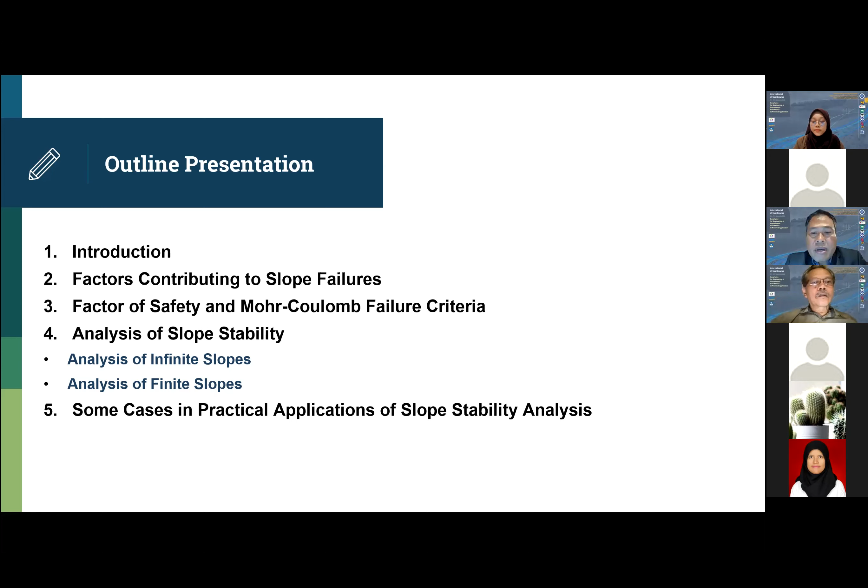In the fourth section will be the analysis of slope stability itself. I would like to explain two types of slopes: one is the infinite slope, and the second one is the finite slope. The last one covers some cases in practical application of slope stability analysis.

Let me start with the introduction of slope. Well, slopes are typically categorized into two types. The first one is natural slope, as you can see in many areas where the slope is formed by natural state, and artificial made slope. This is a man-made slope. Usually in civil engineering we design and construct many man-made slopes.

In other engineering professions, like in mining, for example, there is open pit mining, tailing dams, and many other facilities or infrastructure that are actually man-made slopes. So we need to design that slope.

Natural slopes are formed due to physical processes that include plate tectonics and weathering or erosion of rock masses that result in material deposition. Whereas artificial slopes are established to facilitate infrastructure projects, for example embankment of dams, road cutting, and so forth.

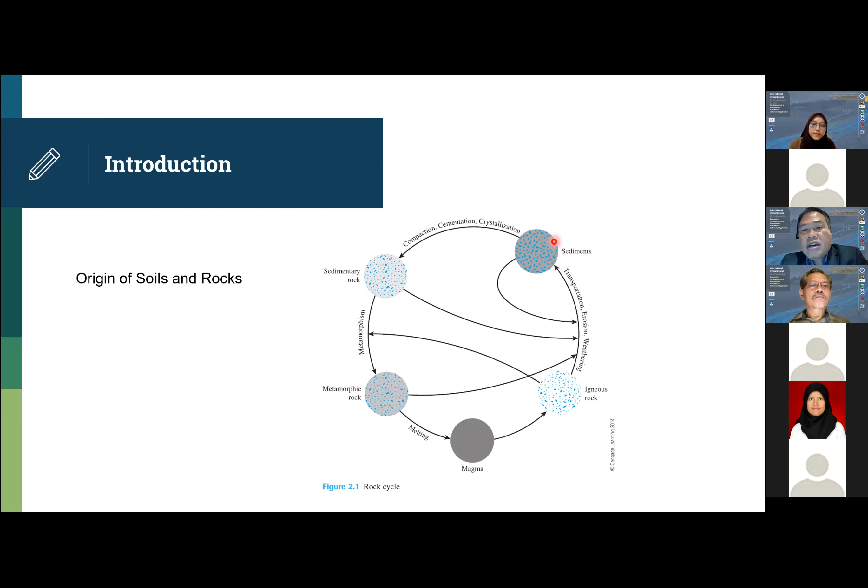It could be eroded or weathered, become a sediment. So there is another form of rock that's called rock sediment, and this sediment also could compaction, cementation, and crystallization to become sedimentary rock.

And then from sedimentary rock, because of metamorphism, this sedimentary rock then becomes a metamorphic rock, and through melting, through magma from the volcano for example, then returns to become an igneous rock. So this is actually the nature of the rock cycle, where the soil is actually the weathering of this rock. So soils and rocks are actually common in nature.

Soil and rock have a very similar formation, except that soil is much softer compared to rock. So in nature, we have a slope problem, either in the rock formation or in the soil formation, depending on whether the slope is stable or not.

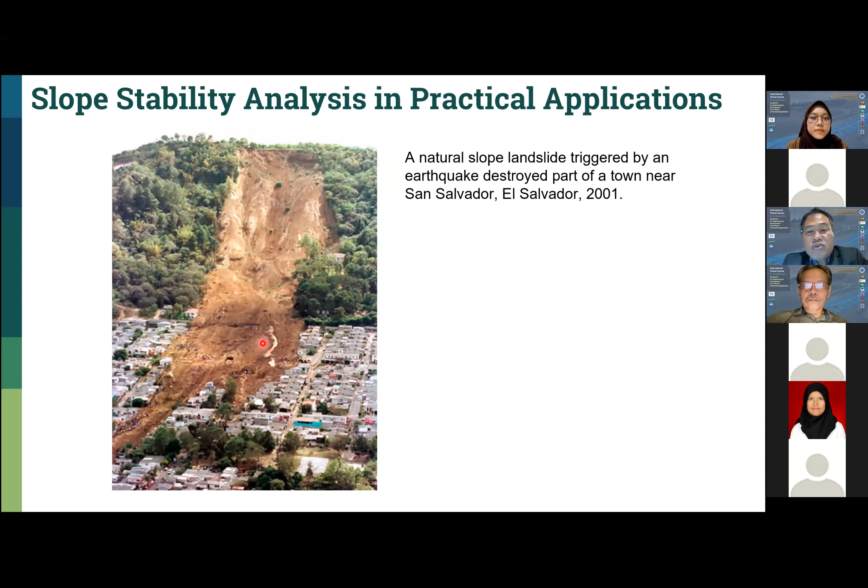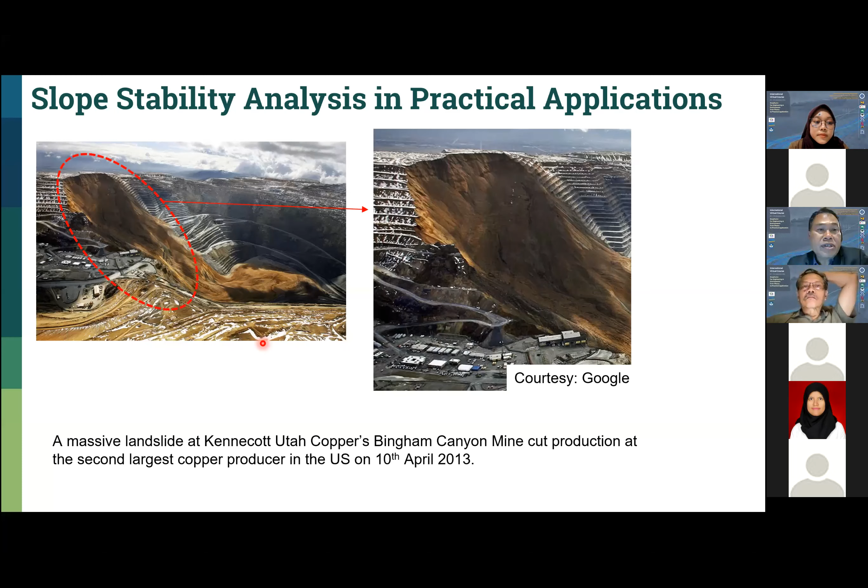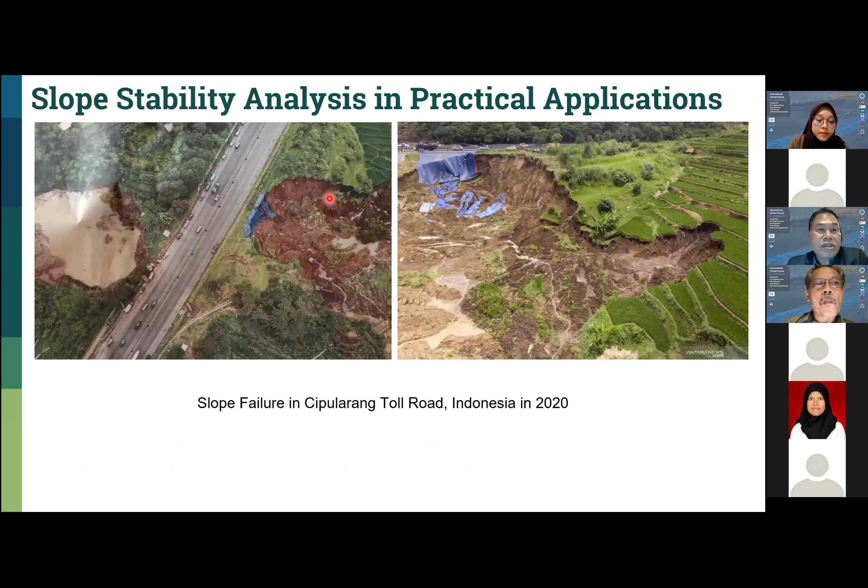Okay, many slope failures - the nature of the slope failure include fall, topple, slide, spread, flow. Many types of slope failure could occur.

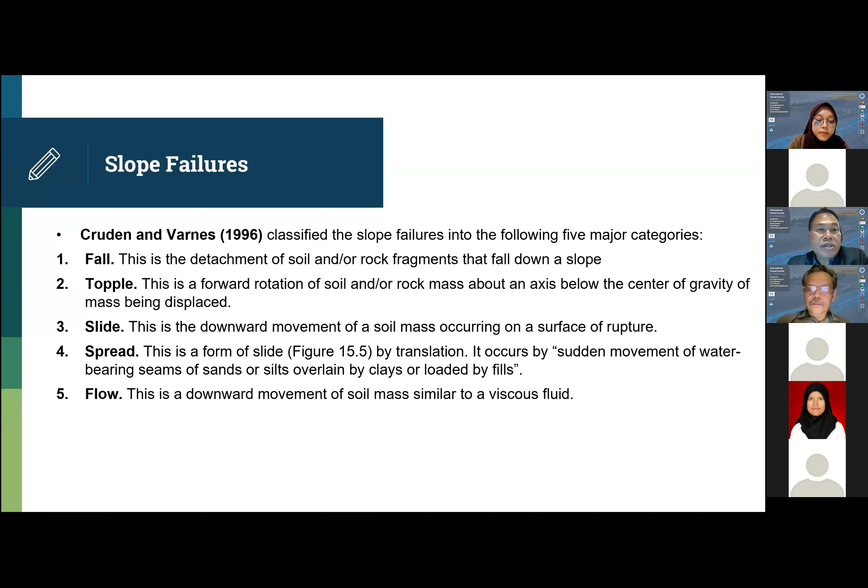It's just like a fluid. Many failures occur in this type of soil because of the combination with precipitation and then...

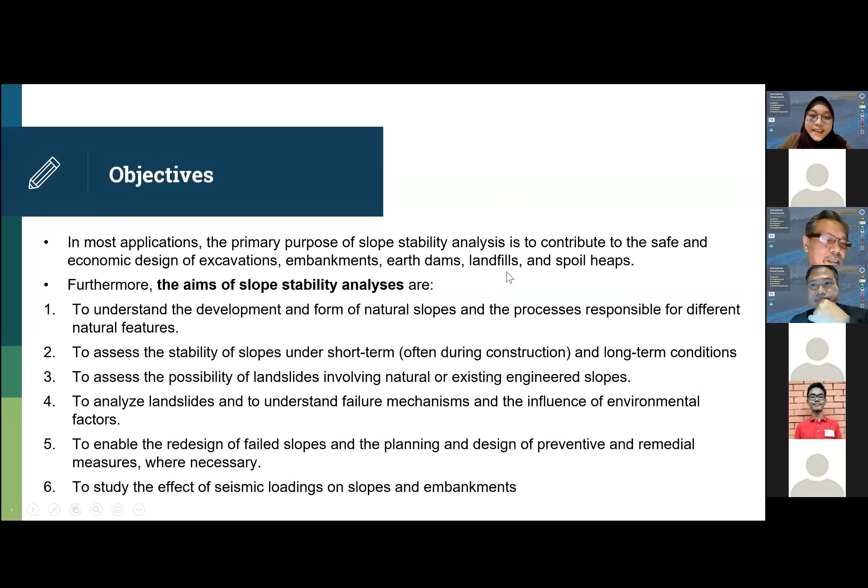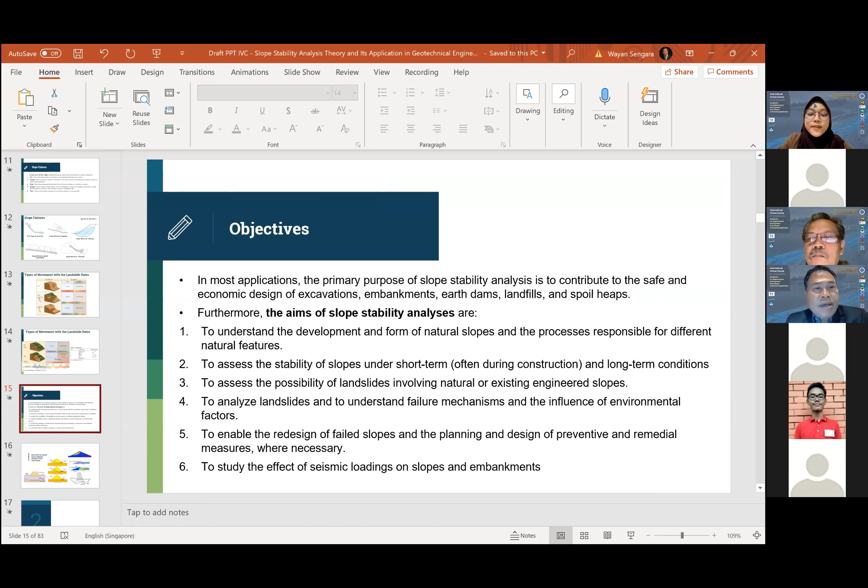Okay, let us continue with the objective. Yes, of course. In most applications, the primary purpose of slope stability analysis is to contribute to the safe and economic design of excavations, embankments, earth dams, landfills, and spoil heaps.

Furthermore, the aim of slope stability analysis is to understand the development and form of natural slopes and the processes responsible for different natural features. To assess the stability of the slope under short-term, usually for man-made slope during construction, and also for long-term conditions.

Number 3 is to assess the possibility of landslides involving natural or existing engineered slopes. To analyze landslide and to understand failure mechanism and the influence of environmental factors such as rainfall, earthquake, etc. Number 5 is to enable the redesign of failed slopes.

If, for example, our design, our construction of the slope fails, it is very common that we would like to strengthen the slope or provide some remedial measures where necessary. And number 6 is to study the effect of seismic load on slope and embankment.

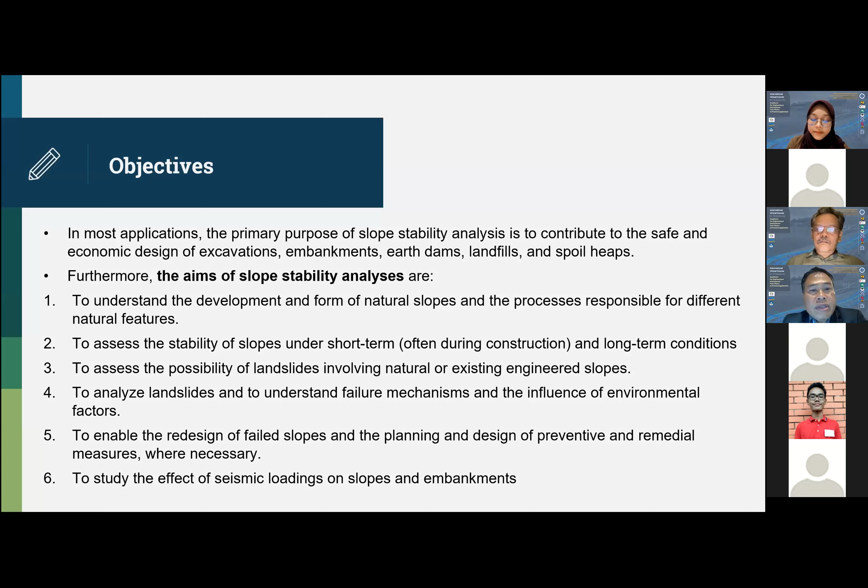So when we design and construct slope under static condition, under its own weight, for example, we also need to design that slope due to earthquake. So usually if we have a slope, for example, like a dam, this is a man-made embankment, we have several geotechnical concerns.

Number 1 is ground bearing capacity. Number 2 is the ground settlement - if we have relatively soft subsurface condition, we need to worry about what the settlement is. And the third one is the seepage analysis, how the groundwater flows through our embankment.

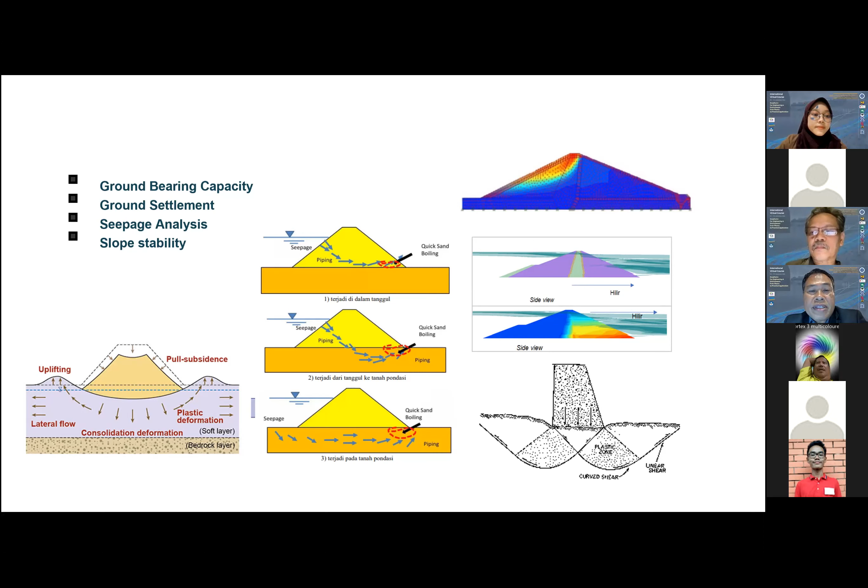The fourth one is slope stability. We need to calculate the stability of the slope, and we need to design so that this dam is stable during the operation. Let's see the factors contributing to slope failures.

This is because of, let's say, its own weight, loading due to rainfall, loading due to dynamic load—whatever generates stress within the slope, we call that mobilized stress.

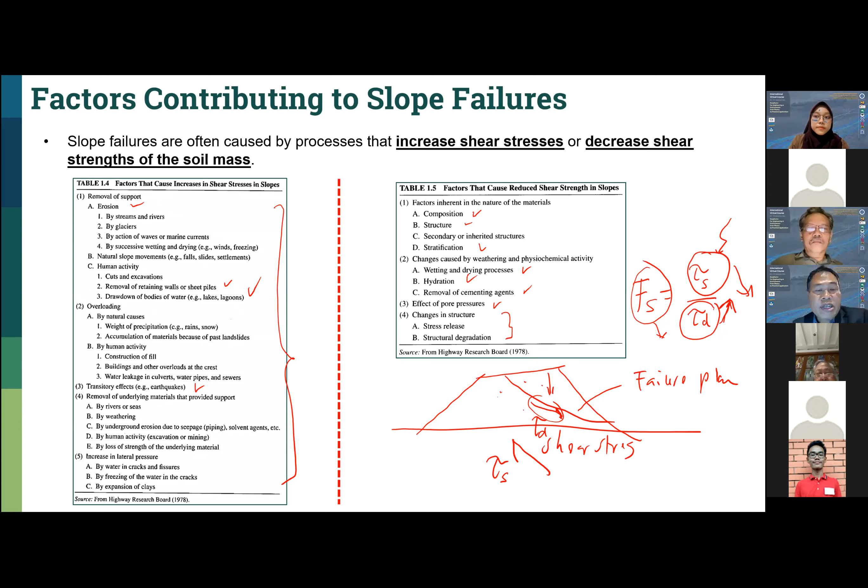Let us move to factor of safety and Mohr-Coulomb failure criteria. I'll just start introducing the safety factor, but later I will explain it in more detail. Let us now define the failure criteria of the soil and rock.

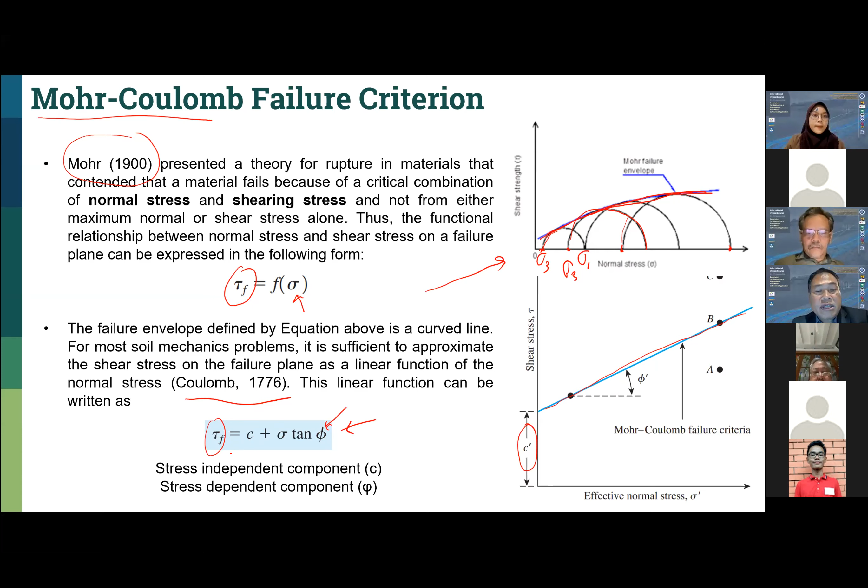So we have two parameters to define the shear strength of soil or rock. One is what we call stress independent parameter, C, and the second one is phi, the friction angle, which is a stress dependent parameter. So we have C and phi.

But Mohr's envelope is actually not linear. Later on, Coulomb and Mohr formulate this. These two professors lived in different years, different generations, but later on Mohr and Coulomb formulated, or Coulomb just called this formulation, the Mohr-Coulomb failure criteria, where this envelope is not non-linear, but simply linear in nature. Okay, so this is the formulation.

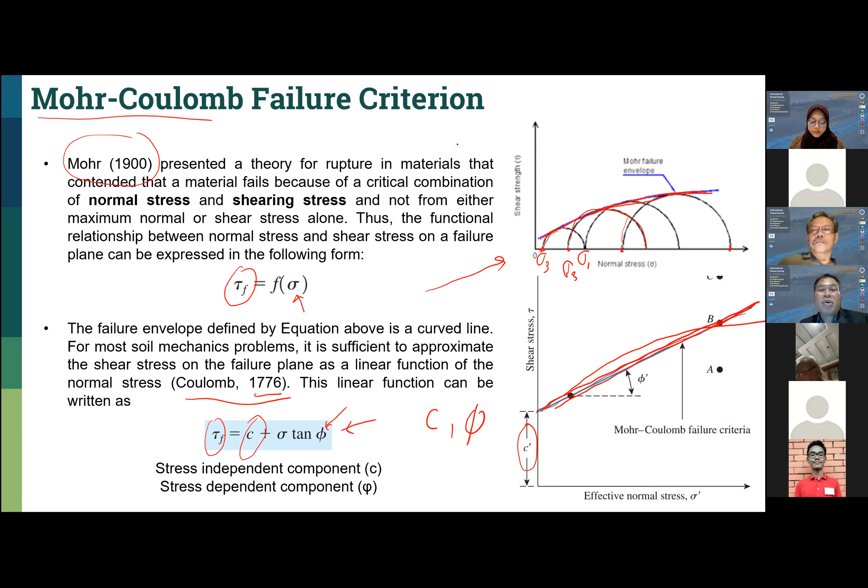Then with these two parameters we can calculate or formulate the shear strength of soil. This C and phi can be obtained from laboratory testing by conducting several triaxial tests, for example like this, and then we see the envelope of the circles, and we find the parameters C and phi of that soil. So these are very important parameters: the stress independent parameter C and the stress dependent parameter phi.

Mechanically, or by state of stress, here we have three states of stress. One is point A. Point A is within the envelope of the Mohr-Coulomb. So if the state of stress falls below the envelope of the Mohr-Coulomb, we call that soil stable. Okay, so point A is stable here.

For example, here in this plane, there's a point AB, plane AB. So there's a combination of sigma and tau. Sigma is normal stress, tau is shear stress. That combination will determine whether a soil is stable or not. So point A is stable. Point B has just failed because it's on the envelope. And point C here is impossible because it's beyond the envelope, so point C cannot exist here. But point B is under unstable condition, point A is under stable condition.

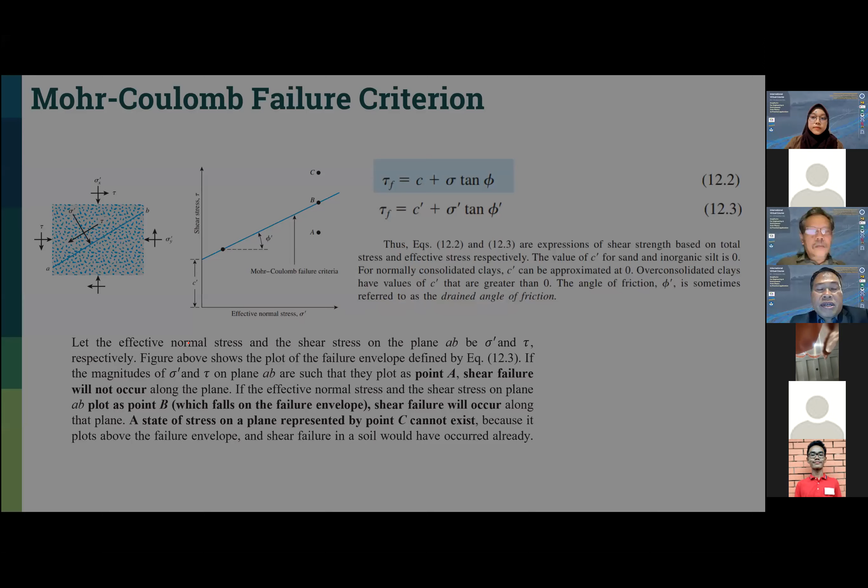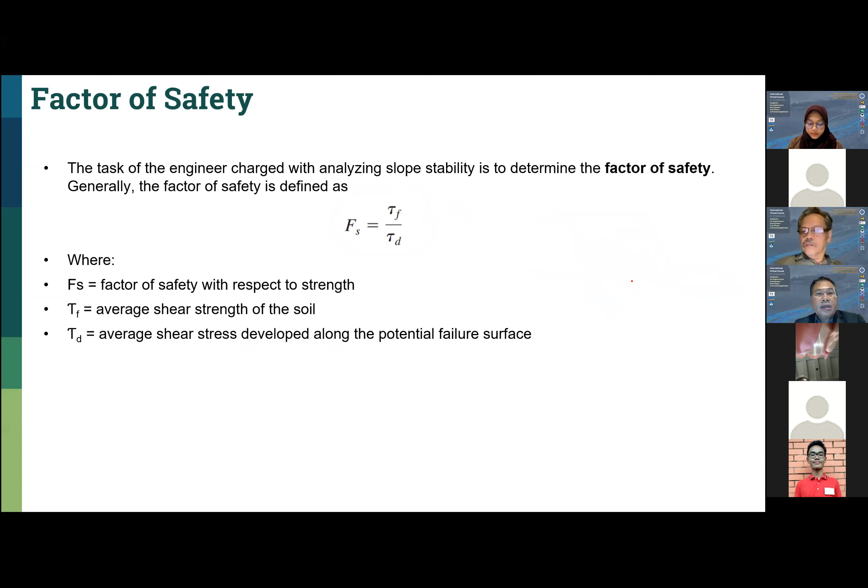Okay, the safety factor, as I already mentioned: tau F, we call it the average shear strength of the soil, usually also called tau S, same thing. Divided by the denominator, tau D, which is the developed stress along the failure surface. So basically we evaluate the safety factor of the slope by comparing these two shear stresses within the slope failure surface. As we can see here, for example, this is the failure surface, this is tau D, and the shear strength here is tau F, and then we compare tau F and tau D. Later on, we will go into more detail on how we calculate or analyze this safety factor.

Okay, we will formulate the shear strength as we already know. Now how do we formulate a safety factor? The shear strength is easily formulated or calculated as long as we know the parameters of the soil, which in this case is C prime and phi prime, and also the normal stress within the plane. As long as we know the normal stress within the plane, the shear strength of the soil can be calculated very easily.

There is a C prime here, and there's a C. C prime is what we call the effective parameter. Why do we call it effective? Because in soil, not like in rock which is very massive, we have water within the pore of the soil. So in this case we have pore pressure. We define effective stress as total stress minus the pore water pressure. So because our reference is effective stress, this is effective stress, and this is total stress, but within the soil we have pore water pressure. Okay, so our reference is usually effective stress.

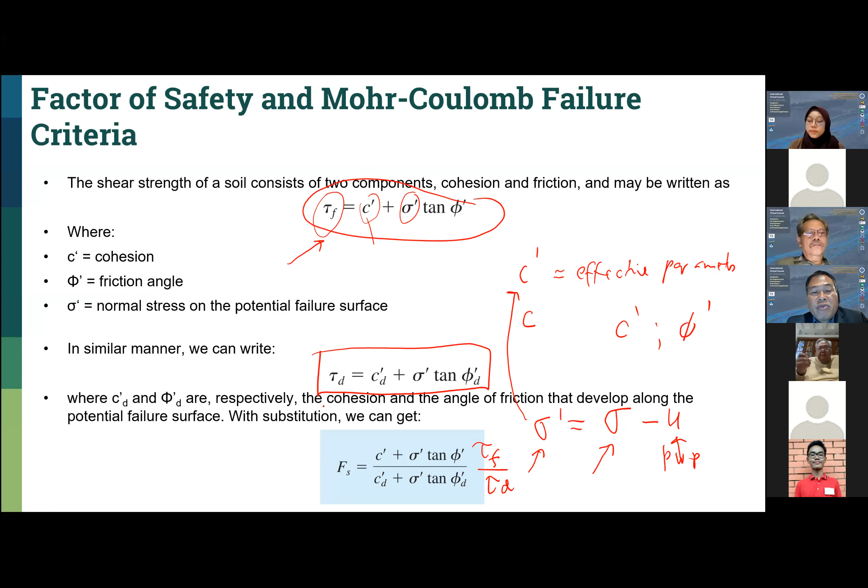The shear strength is formulated as this, but the developed stress is formulated in a similar way, except here we have C sub D and phi sub D, the developed cohesion and developed friction angle. This makes the formulation equivalent to the shear strength, but it's actually like imaginary cohesion and imaginary friction angle, so that we can formulate the developed stress in the same manner as the shear strength.

Then we have what we call FC prime, the safety factor with reference to cohesion. The definition is C prime divided by C sub D prime. We have another safety factor, F phi prime, equal to tangent of phi prime divided by tangent of phi developed prime.

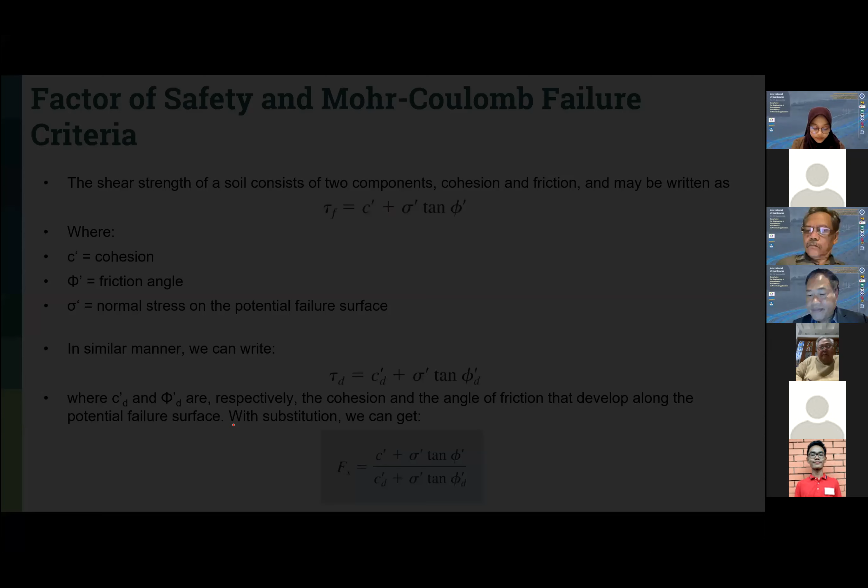So this is just a way, a medium, to formulate the safety factor. When we can make FC prime equal to F phi prime, then we can define the safety factor. This will take some effort to find out how we can make FC prime the same as F phi prime through a little bit of trial and error, satisfying the formulation of this equation.

Okay, this is as we already understand what the safety factor is. In this case, safety factor higher than 1 means the slope is stable. But when safety factor is less than 1, we say the slope is unstable or fails.

When we design a slope or evaluate a slope, we need to make sure that the safety factor is higher than 1. But there is a criteria to evaluate that the slope is stable under different conditions. Here is the recommended minimum values of safety factor for slope stability, particularly for a man-made slope.

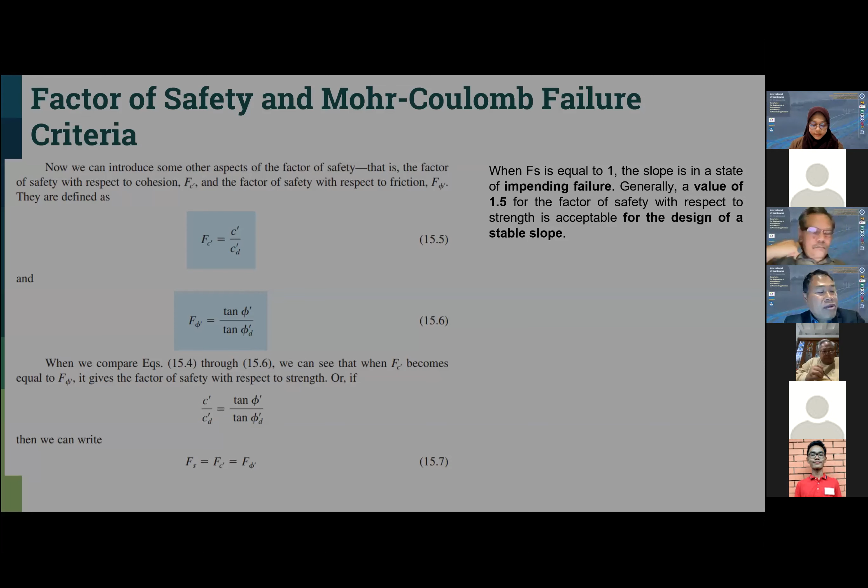Even for natural slopes, we could evaluate the stability through the formulation we discussed briefly. When the value of the safety factor from the calculation shows a number lower than what's shown in the table, then we can say that the slope is unsafe.

Let us start with the recommended minimum value of safety factor for a man-made slope: a slope with cost and consequences of failure where cost of repair is comparable to cost of construction, or no danger to human life or other property if the slope fails.

Here we have two conditions also, uncertainties of the strength measurement, one small, one large, and we define the value differently. 1.25 because uncertainty is small, meaning we are more confident with the variation in the strength of the soil, so we need a lower number, 1.25. If the uncertainty is larger, then the value is 1.5.

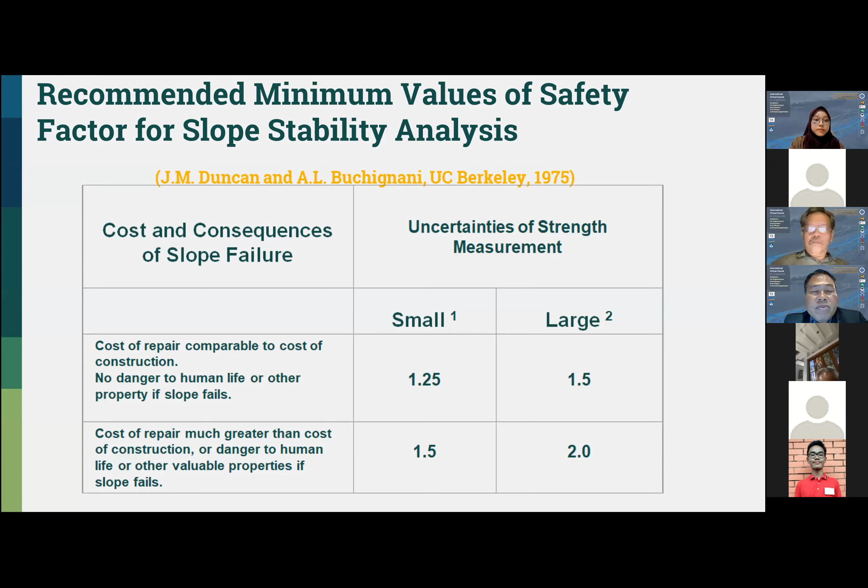Okay, let's move to analysis of slope stability. I'll explain briefly because of time constraints in this course, since it's only a 2-hour course. It's impossible to cover all the methods of calculating slope stability analysis. So I will just cover the method of slope stability analysis for infinite slope, and then the second one for finite slope, also for simple soil layers.

There is a reference for you who would like to study more about slope stability analysis. You could refer to some references on slope stability, or take other more advanced lectures on slope stability. Basically, this course is just to provide basic knowledge, an introduction to slope stability, how it is calculated in general.

We start with the infinite slope. Infinite slope means the thickness of the slope, in this case h, is the same all the way across. This means the height of the slope is very small compared to the length, for example a very hard layer. So the slope will just fail, incorporating the whole mass of this layer. So the height compared to the length of the slope is very small, and we can consider it an infinite slope.

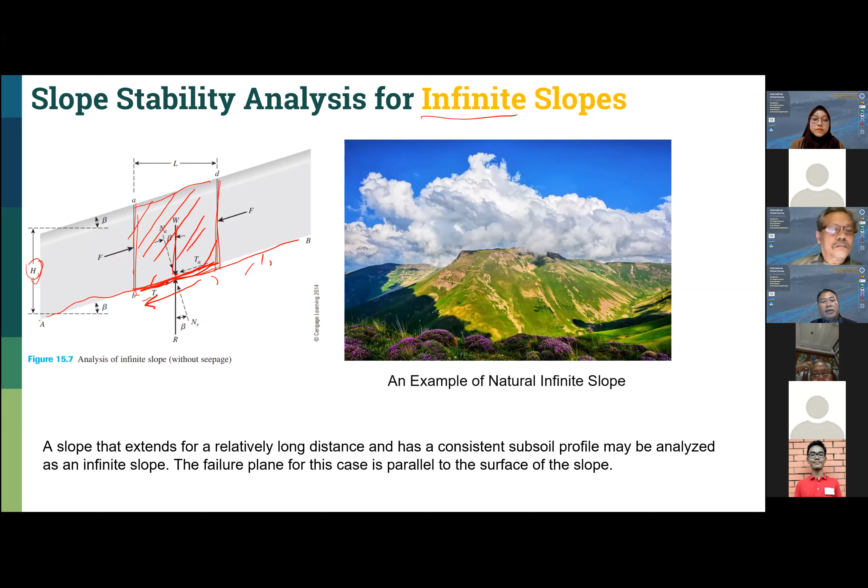This weight will act on the plane, and if we distribute the weight uniformly through this plane, divided by the area of the plane, we get a normal stress to that plane. What you can see is you can simply find the shear stress developed on this plane - that is what we call induced stress or developed stress.

Let's see more clearly here. This is W, this is still forces. We can break down this W into components normal to the plane, NA, and tangent to the plane, TA. This is the reaction R, and TR is also the reaction of TA. So if we have W, we have R as the reaction. Basically we have equilibrium between the internal forces due to the weight of the slope.

Later on we can evaluate the strength, the shear strength of that plane within the soil due to NA normal to the plane. So if we have NA, we can calculate the normal stress in that plane. We can formulate that, going along with this mechanics and geometry, so we can calculate the normal stress and the shear stress within that plane - developed stress, just transferring from forces to normal and shear stress through the area of the base.

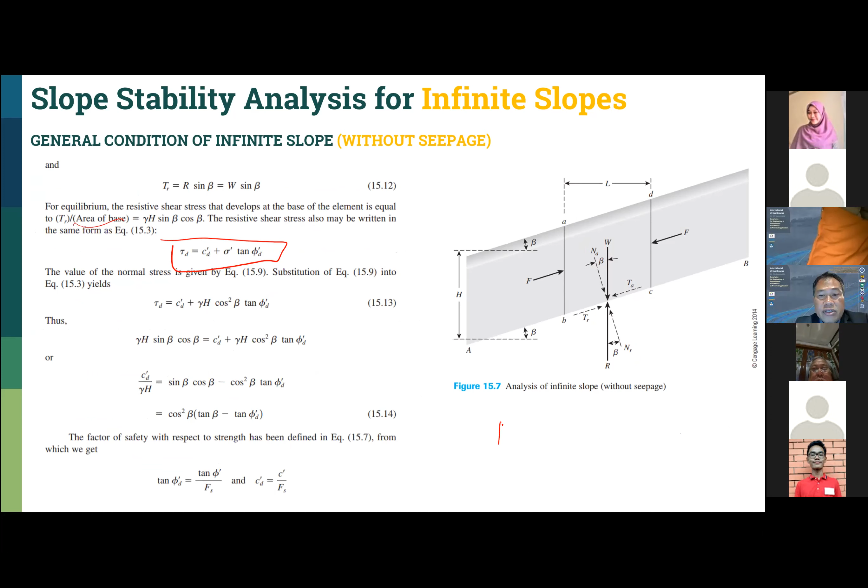Finally, we use this formulation of safety factor: C prime plus sigma tan phi prime, divided by C sub D plus sigma tan phi sub D, the developed stress - the formula we already discussed earlier. Then by calculating each component of the safety factor, C prime and phi prime, we can formulate the safety factor.

Ultimately, this is the formula for calculating the safety factor for an infinite slope like this, if the soil has C prime and phi prime as parameters. I just put it in Excel very easily - you can calculate the safety factor of this infinite slope.

If you have granular material, meaning the cohesion is zero, so you only have the friction angle of the material - for example, a sand soil layer - the safety factor is simply tan phi divided by tan beta, where beta is the slope angle. You can find the usefulness of this formula in...

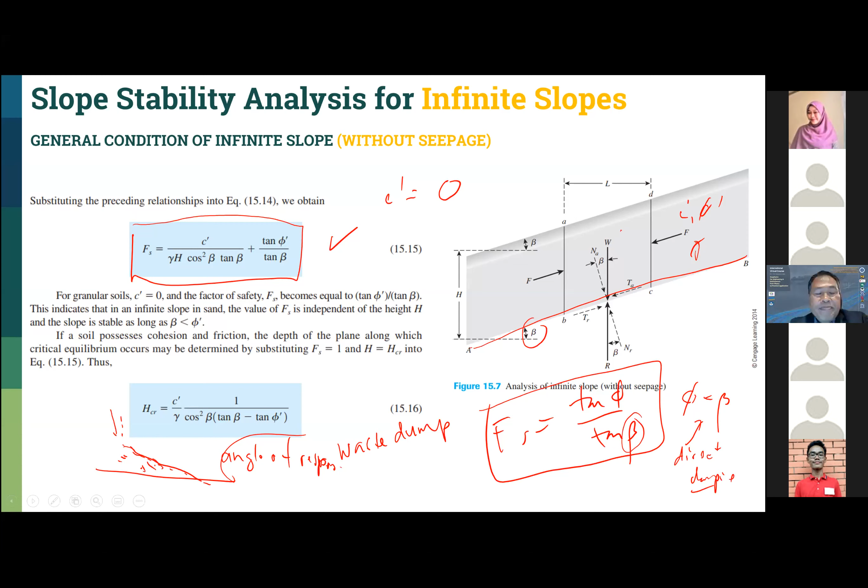This angle of repose is actually the case because when you dump the material, the safety factor is equal to 1. That means the beta, the slope angle, is the same as the friction angle. So phi is equal to beta for direct dumping of material. In mining, usually for rock dumping, phi is equal to about 37 to 38 degrees.

That is the safety factor of the slope. Other complication of the slope could be when we have groundwater flow through our slope. When we have groundwater flow through the infinite slope, we need to consider what is the pore water pressure that occurs in this failure plane. The pore water pressure here depends on the seepage.

We can use what we call equipotential lines and flow lines. So usually we have a flow line like this, and an equipotential line like this. You draw a flow net within the slope, and when you can draw the flow net, then finally you will be able to

estimate what is the pressure head within this plane. With the pressure head, later on you can multiply it by the unit weight of water to find out what is the pore water pressure here. So when we have the pore water pressure, you can calculate the effective stress as the total stress minus the pore water pressure that you calculate from the flow net.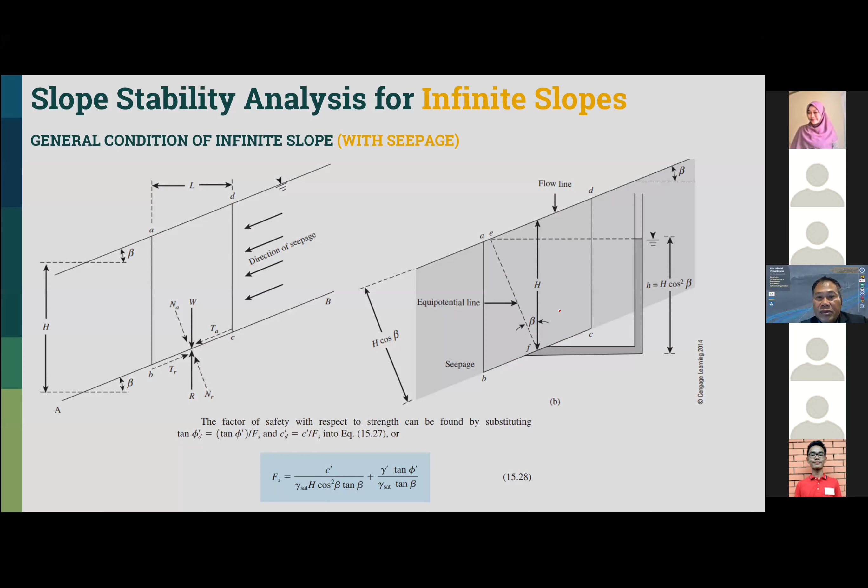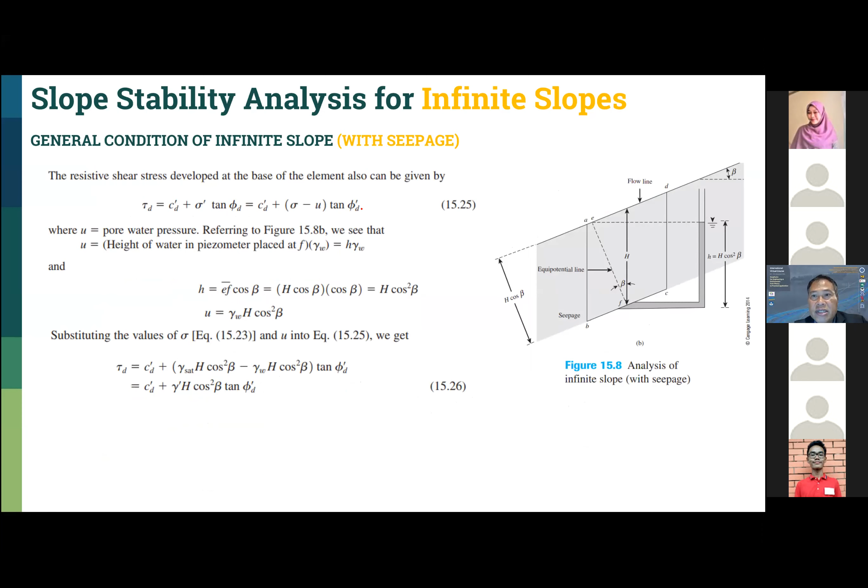With that, you can also modify and revise the safety factor formulation based on the groundwater flow. So we have that formulation. I think you can just follow these notes, I took these notes from a textbook that we use. This is the result of our safety factor formulation when we have groundwater flow through the infinite slope.

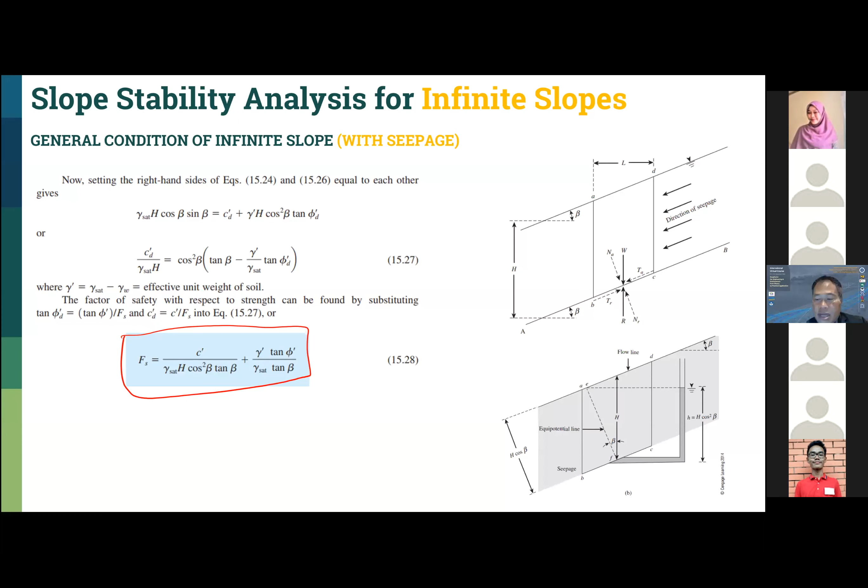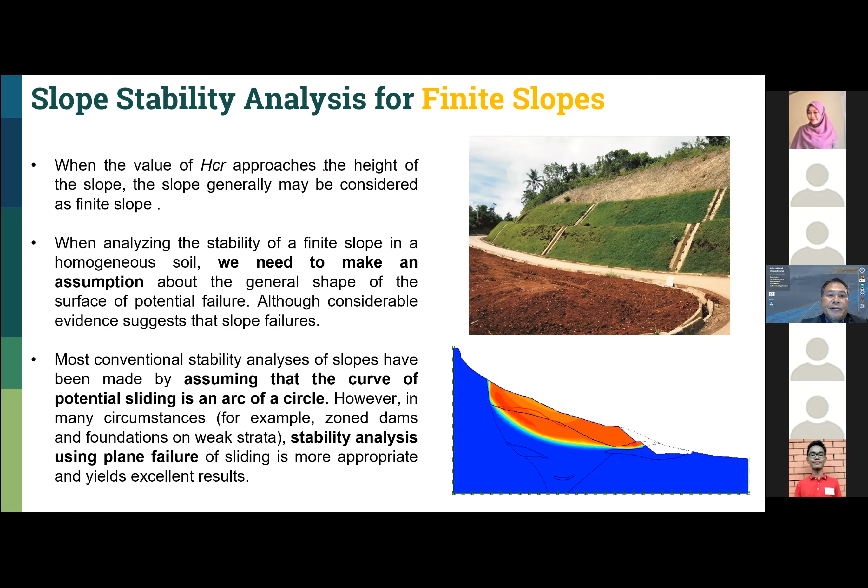Let's continue with the finite slope now. Finite slope is a slope where the slope failure plane is not infinite. For example, like this is finite. So it is not as far from the infinite slope.

In this case, we can also make equilibrium of forces within this plane. When we have a very uniform soil like this, or uniform rock, for example, we can define a plane, a failure plane. We assume that within the zone, this is its failure plane, and then after that we calculate what is the weight, similar to what we have done with the free body of the infinite slope.

With similar calculation of the slope, then we again define or calculate the safety factor based on the shear strength of the soil, or rock, in this plane, and then we can find what is the developed stress within this plane as well. We can formulate this geometrically and satisfy the Mohr-Coulomb failure criteria, as long as we have the cohesion and the friction angle of the material itself.

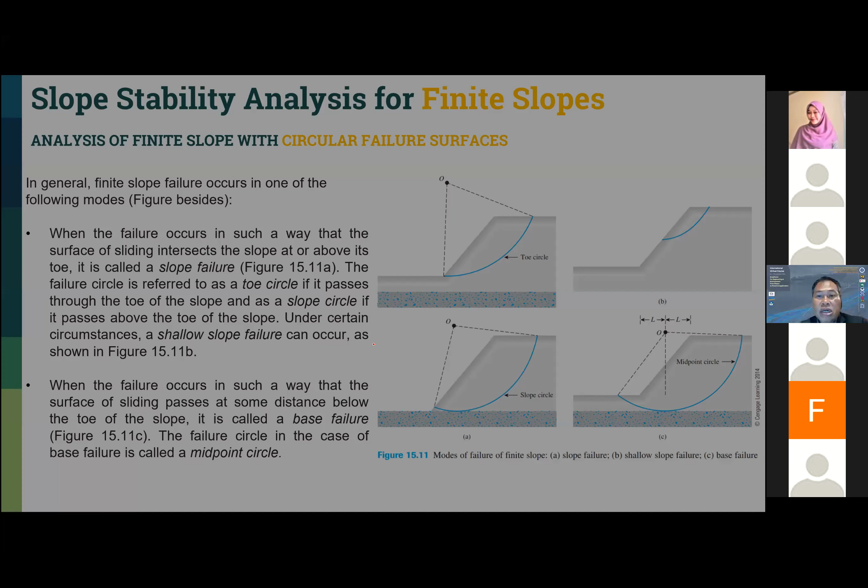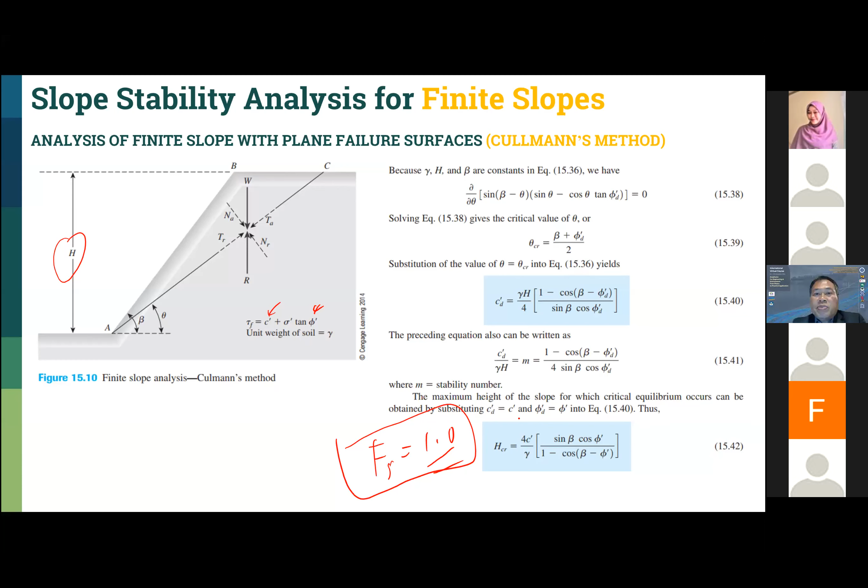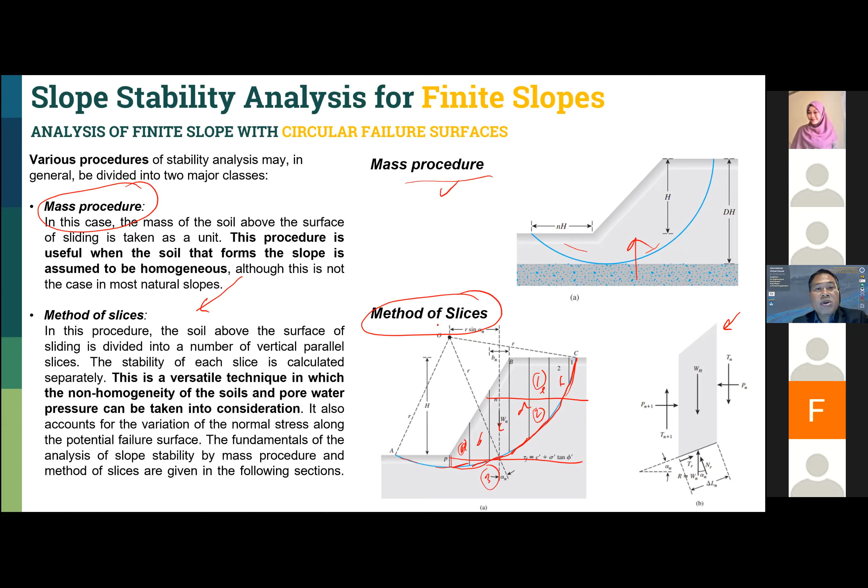Okay, mass procedure, I will go very quickly on this. For those interested in more detail on how to calculate the mass procedure slope in homogeneous clay soil, you can refer to the reference I put in this document. I don't have time to explain each method in detail, but basically the mass procedure is applicable to homogeneous soil, whether it's clay or sand or granular soil. In geotechnical engineering, in soil mechanics, we differentiate between sand or granular soil and clay soil.

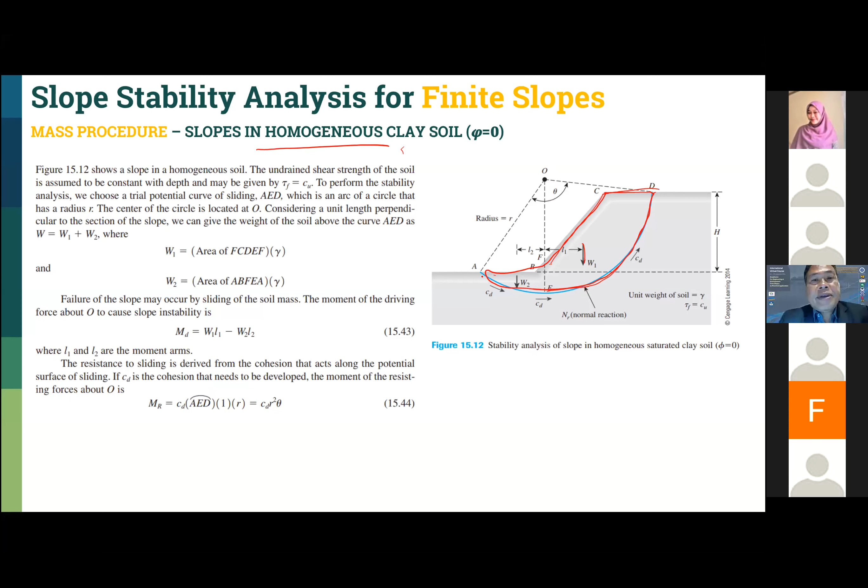Okay, basically, what is the mass procedure? The procedure is to assume the whole mass of the slope as one unit, and the calculation of the forces is by considering the whole mass.

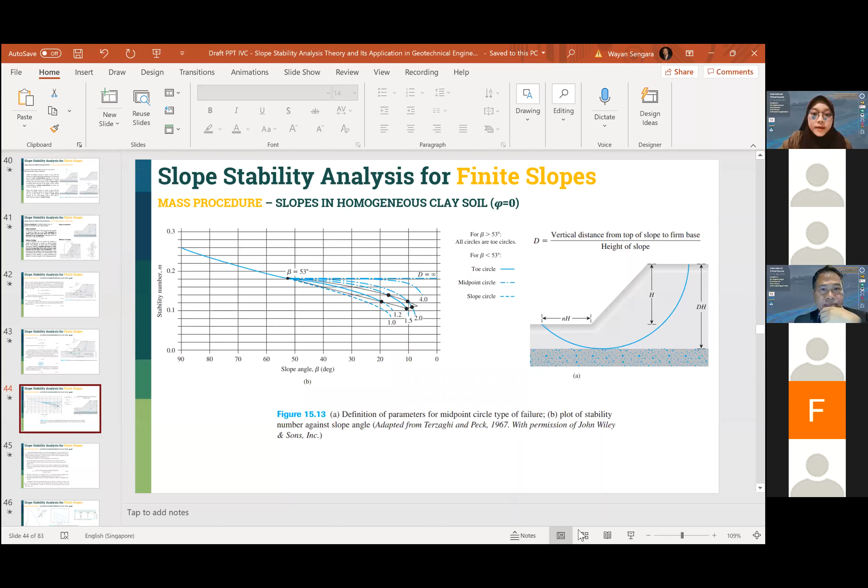Hello, can you hear me now? Yes, yes, clearly. Okay, let me continue again. Yes, please. Okay, can you see the screen? Yes, now. The connection is bad, so I just keep talking without anybody listening.

Okay, the value that we can use for calculating the safety factor of the slope. There's a procedure, there's a graphic for helping the calculation of the slope. Okay, I'll just go on.

Hello. Yes. Okay, can you see again now? Hello, can you hear me now? Yes, yes. Hello. Yes, I can hear your voice. Okay, let's start again. Yes please, I think the internet connection is bad. Can you see now? Hello. Yes, I can.

The second one is the Bishop method, because there are two equilibrium conditions satisfied. This is more complex - the static equilibrium that needs to be satisfied becomes more complicated because each of these slices needs to satisfy the equilibrium. You can actually use Excel for this, but the calculation is more complicated compared to the ordinary method of slices.

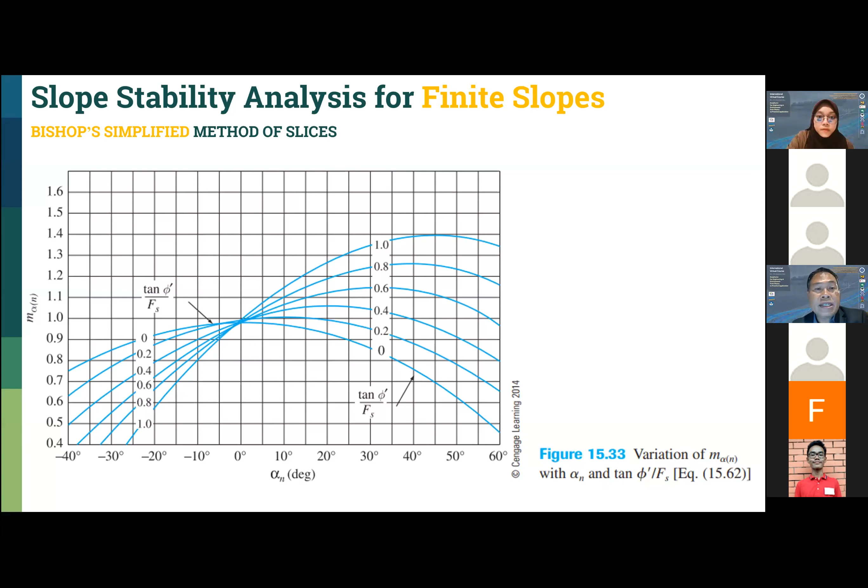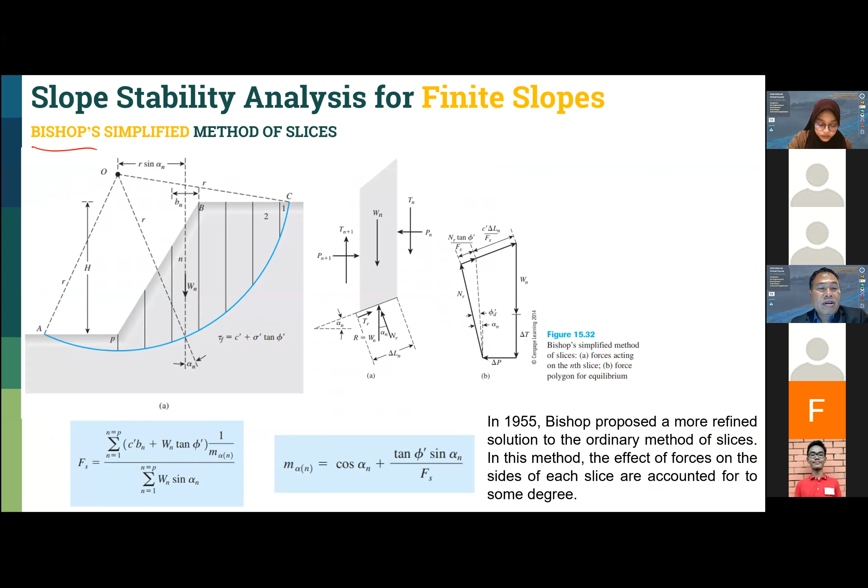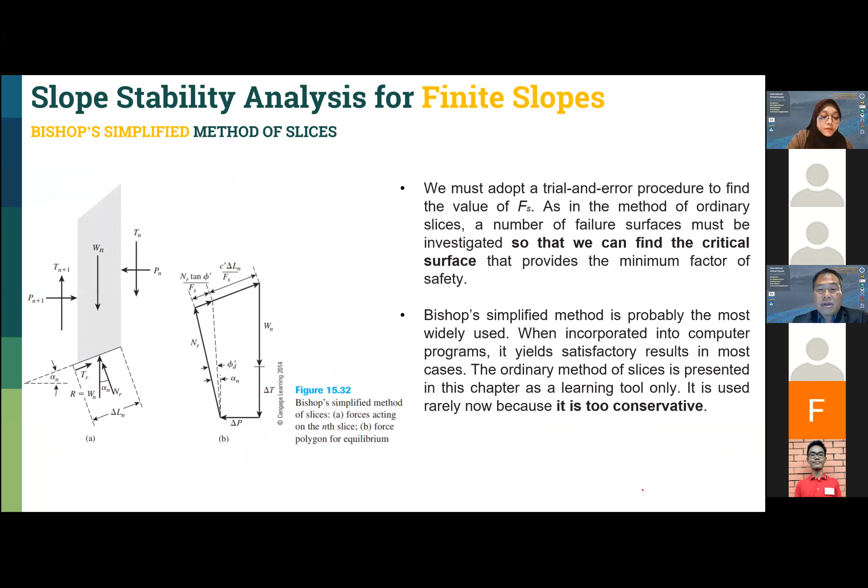But with the help of computer calculation, all of this equilibrium for each slice could be solved fairly easily. So there's a lot of force equilibrium for each of these slices. Later on, you can formulate the safety factor based on the integration of each slice, so that finally you can calculate the safety factor of a layered soil slope.

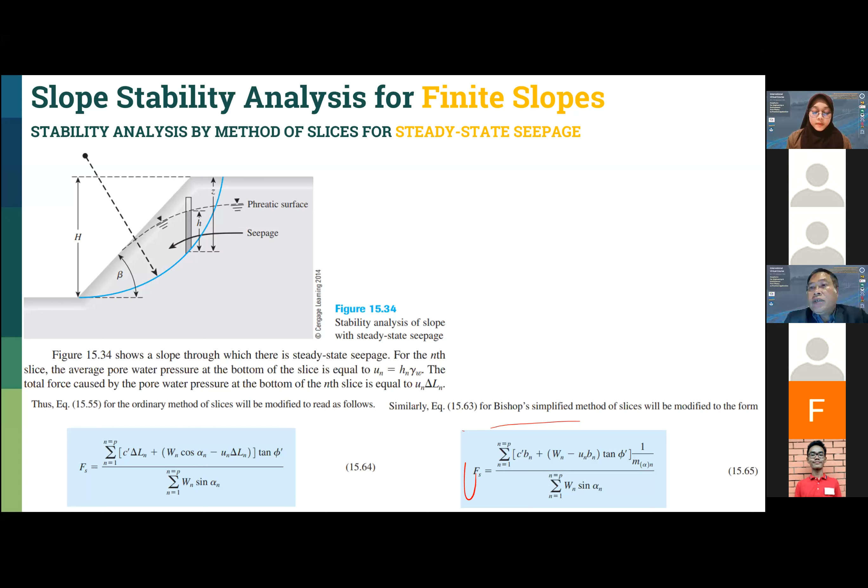Okay, I just completed the calculation. Let's go a little bit further. For example, we have an embankment here.

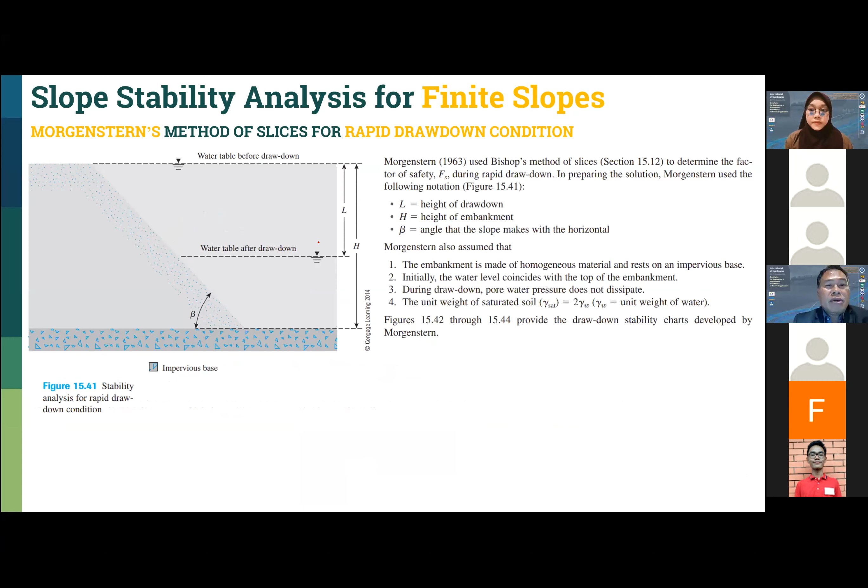At the bottom we have, for example, clay soil. This clay soil is relatively saturated and we put load on top of it - for example, you have a dam, or a tailing dam, or a reclamation project. In relatively soft soil, this is the type of behavior during construction.

During construction, the safety factor is getting lower. But when the embankment is already there, when construction is already completed, there is consolidation of the soil that makes the safety factor increase with respect to time. As time goes, the safety factor increases.

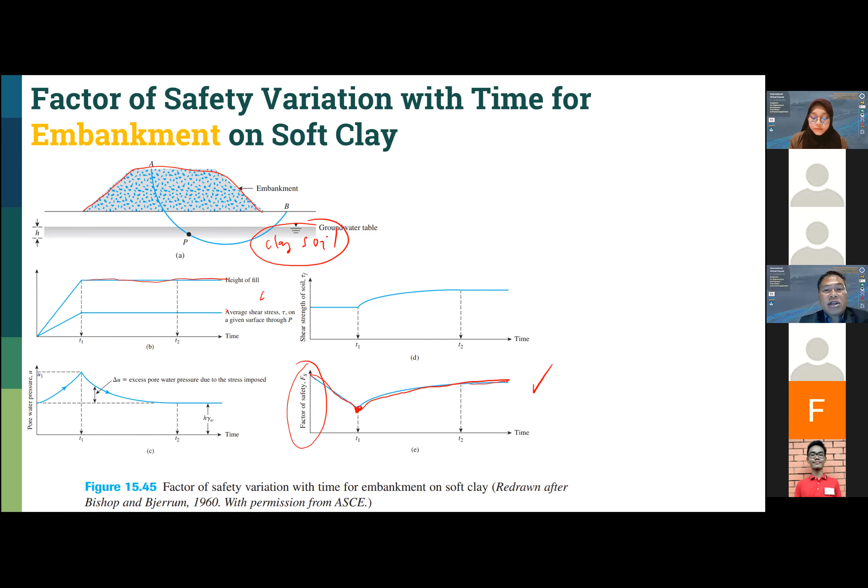This is shown by this curve. As the loading increases, and then after construction the load is constant, the excess pore water pressure decreases, and because of the decrease in excess pore water pressure, the shear strength increases.

The opposite is true when we have excavation. For example, we make a reservoir for oil drilling - for the oil company, we need to construct a reservoir and excavate the existing soil. So what could happen is if we have clay soil, the safety factor will reduce with respect to time. That's some behavior of clay soil with respect to stability during operation of the facility, dam or reservoir, whatever you construct.

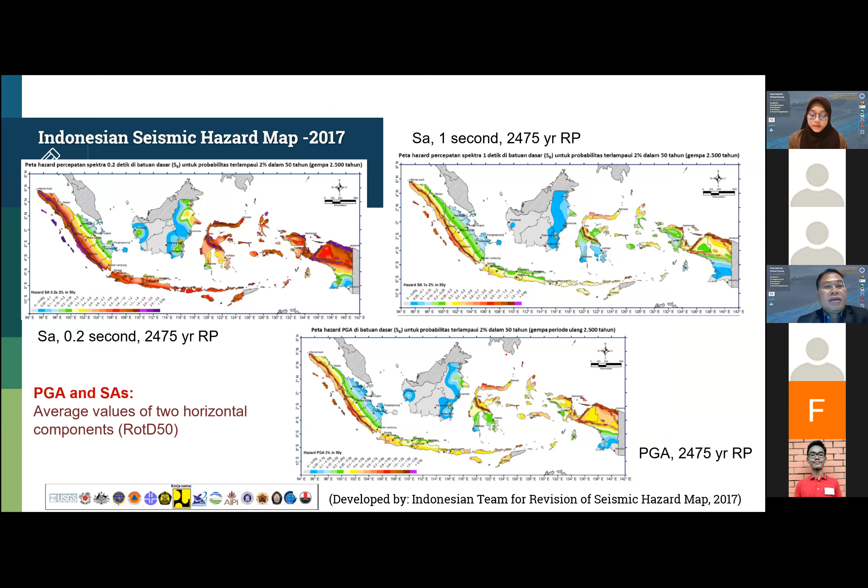This is a brief introduction, a brief highlight on how the slope could reduce in safety due to earthquake loading. If we have a dam or any existing slope, under static loading it will be very stable. But be careful - when you have an earthquake, the earthquake will be transmitted to the site, and there is some modification of the site, whether beneath your dam you have soft soil or hard soil. An earthquake could decrease the safety factor of your slope, the embankment.

That is an illustration of how the slope or the dam will behave.

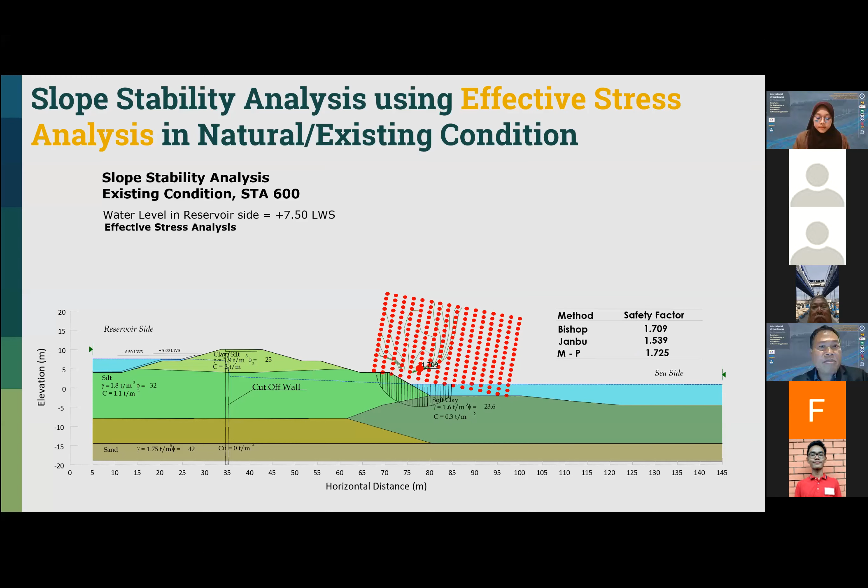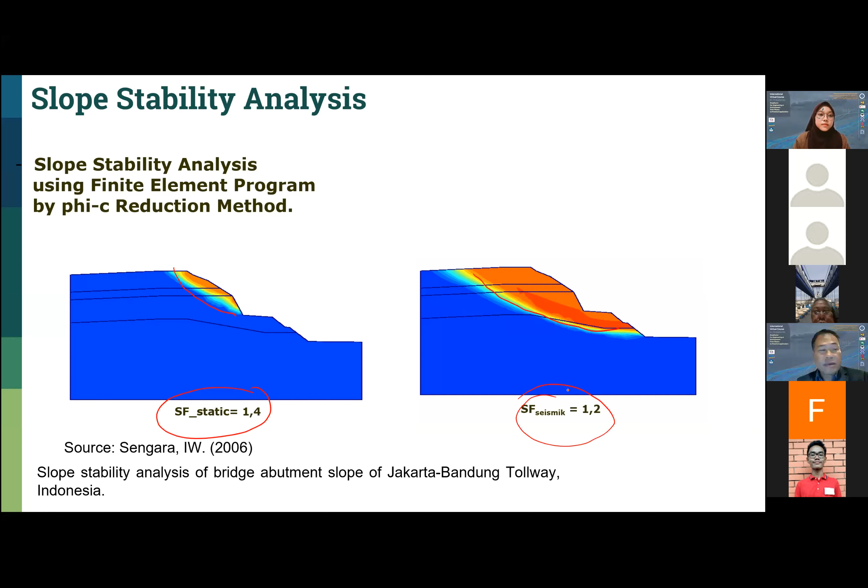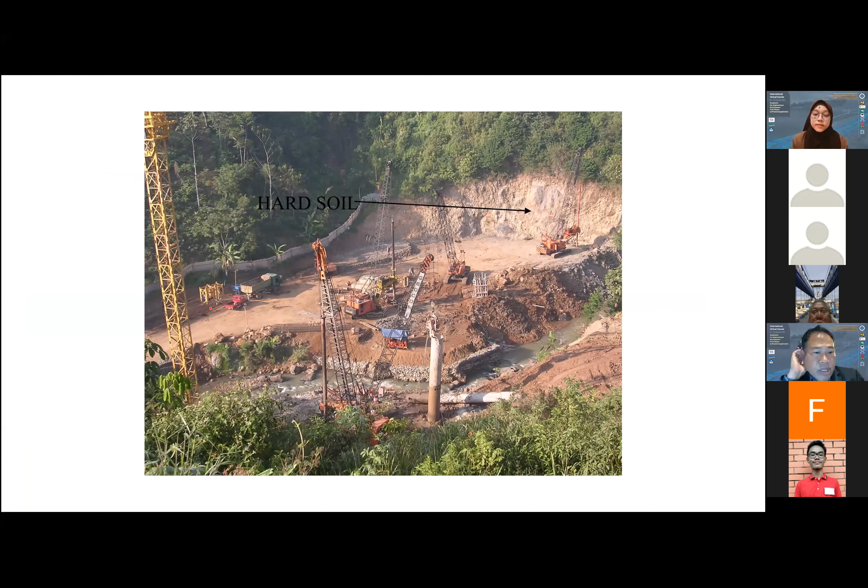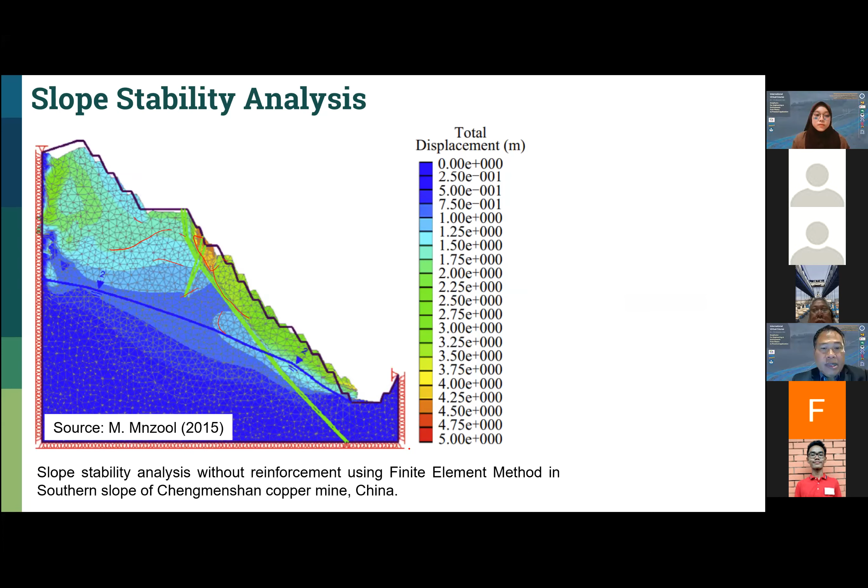Another one here is also an open pit mine using a different limit equilibrium method, similar to what I just showed previously, and also comparing it with the finite element method, showing different values of safety factor from different failure planes. So we can compare the limit equilibrium method, as we explained and elaborated in this course this evening, with the finite element method as well.

This is subjected to earthquake load of 0.3 G, and see what's going to happen. In this case, you can see the slope will fail under the earthquake load of 0.3 G, even though the slope is stable under static condition. If an earthquake of 0.3 G occurs, we can make a prediction out of this analysis.

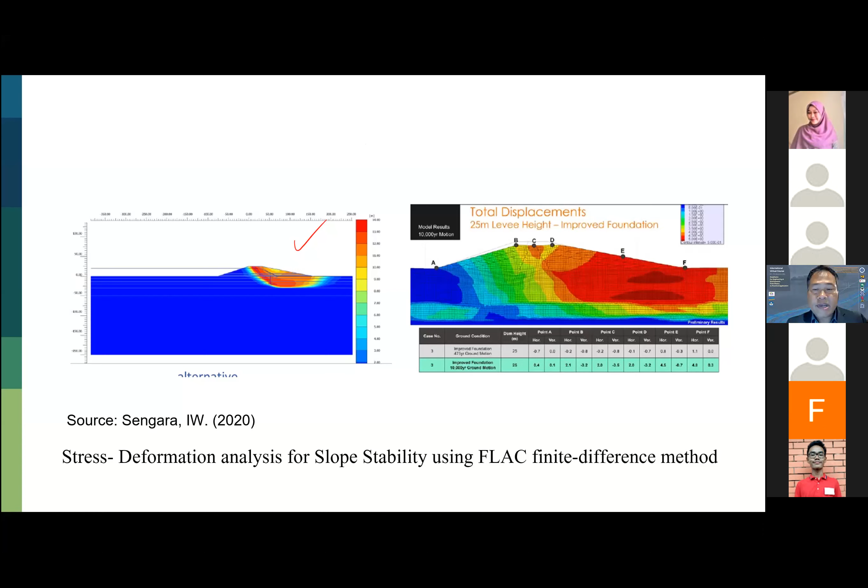This case example that I would like to share with you, this is all that I would like to present this evening. So this is the end of the lecture, the end of my presentation. So later on we can have...